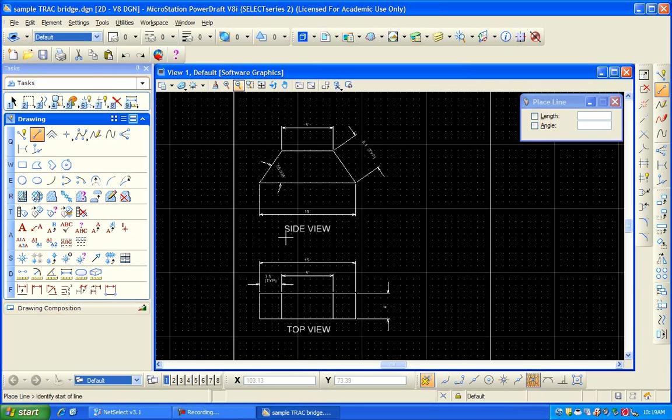The last view I need to draw to describe my simple bridge is the end view, which ties in information from my side view and top view. To start, I'm going to enact a place line command and translate lines off of the top and bottom of my side view. Then, since I can't translate lines from my top view because it's not in the same plane, I'll just draw a regular vertical line up and down.

Anywhere is fine. To get the width of my bridge looking down, the width of the roadway was 4 inches, so I'm going to enact a copy parallel of 4 inches, which is still remembered from my last save settings.

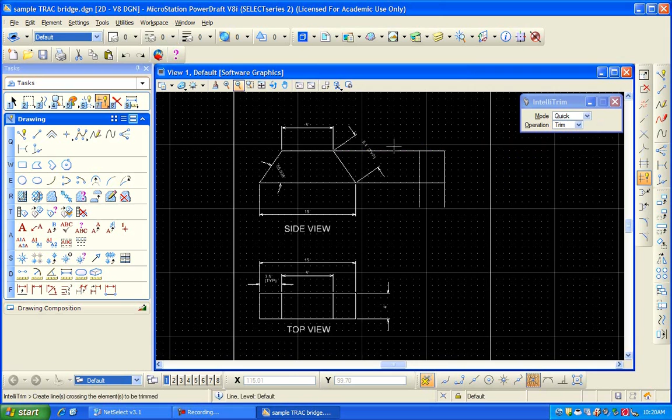I've got my basic rectangular shape of what the bridge would look like looking down it, except for all this extra stuff that I need to trim. So I'm going to use my IntelliTrim and quickly clean up, reset, and pick a new line.

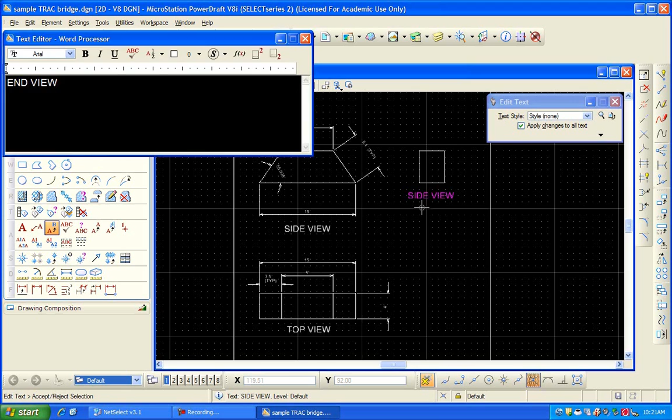I can also copy over the label from my side view, but we'll call this the end view. To do that, I'll go into my edit text, rename it end view, and do a data point to enact that.

Then I can go ahead and place my dimensions for the dimension element for the end view, which I will do after zooming in a little closer.

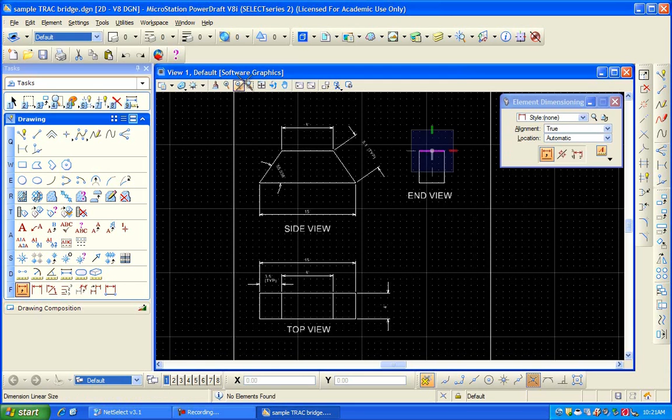So there's my 4-inch road width. And earlier I mentioned that this was where we were going to get the height of our truss. Sure enough, that's 5 inches, so that's important for this view.

The last thing I will do to describe my end view is to go ahead and clean up the dimensions to include the units of inches.

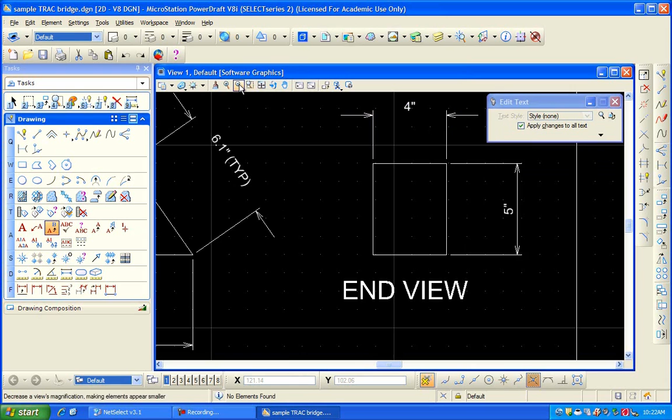Okay, I have my 3 views drawn completely. The next thing I'm going to do here is provide some notes and title block information for the sheet, and to do that, I'm going to fill out the title block first.

So I'm just going to copy some of my larger size text here and place that on the bottom, and do an edit text.

And it's always good to list what the job is, so always good to list who did the design, and the date it was done.

And if you had multiple sheets, you'd number them all differently, but this is just sheet 1.

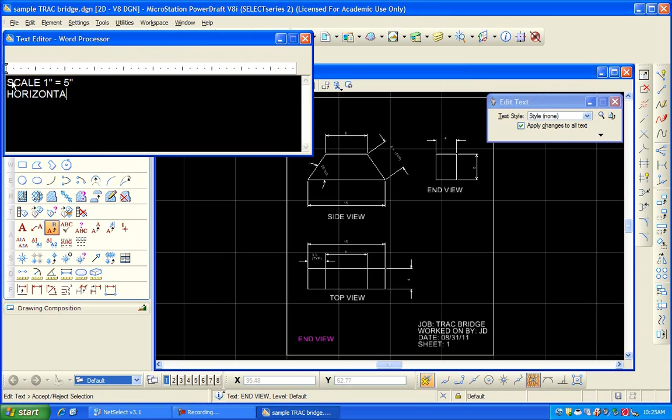And for the printout, we're going to be doing a scale of 1 inch on the paper equals 5 inches in real life, and that is both horizontally and vertically on the sheet. Horizontal and vertical, data point accept.

And then the last thing, it's also good to include some notes on the sheet if there's specific things you want to talk about. I'm going to include one note on here.

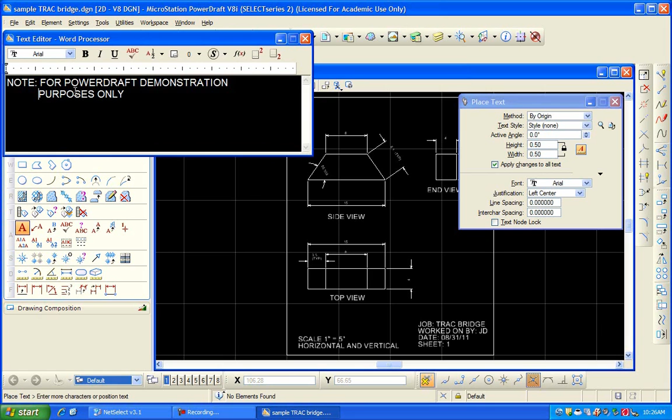So I'm just going to go to the place text command. My notes are usually the same size as my dimension text, so I'm going to say note: for PowerDraft demonstration purposes only. I've got my origin selected, so I'm going to go ahead and place that there.

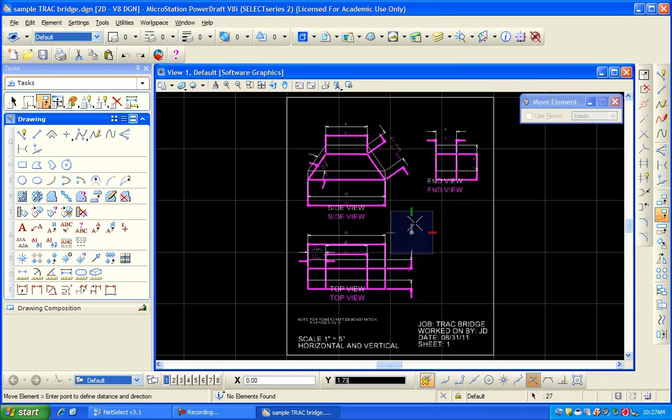I want to just move this up in the view a little bit. So I do a move, and I'm just going to move everything up, shift it up just a little bit. Then reset and do another element selection to get out of it.

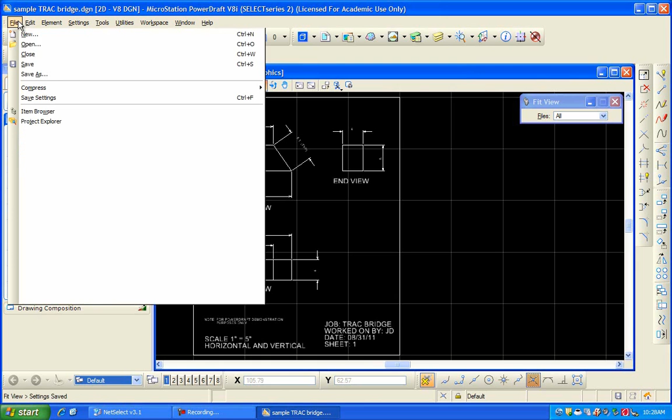I'll go ahead and do another fit view, maybe adjust the screen a little bit, and this is the way I want my design to look to print out. So I'm going to go ahead before I do that and do a file save settings, so that if I get into the file later, it'll come back up to this view, and for good measure I will also go ahead and do a save.